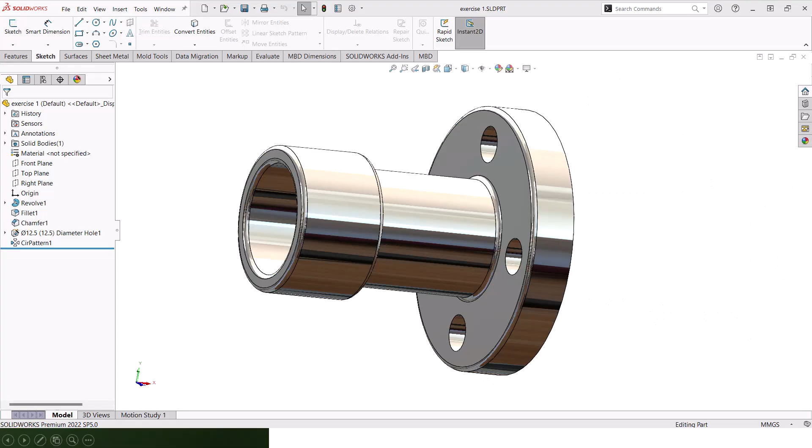What you're looking at here is the 3D model that you will be ending up with if you follow this tutorial along. Now let's go ahead and create it.

To create this part, go to New, click on Part, and then click on OK. Select the front plane and go to Sketch.

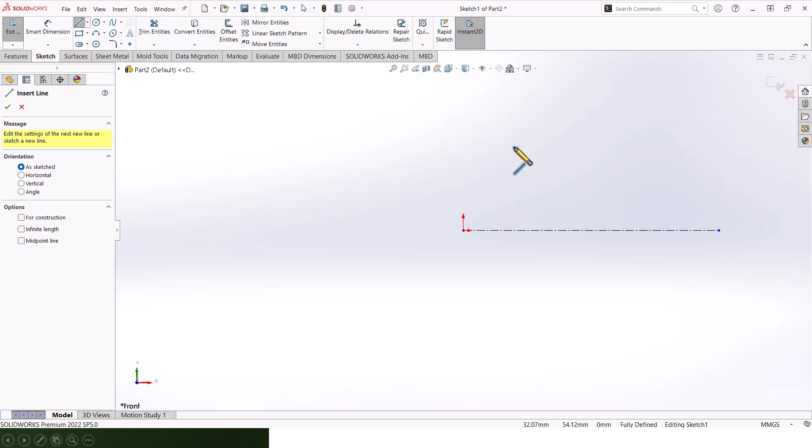Create a center line and then start sketching around the center line. Something that would look like that. So not necessarily the exact shape, you can just design something similar to these. Close your loop. Once you get this grayish area, then you're good to go and you're good to add in dimensions.

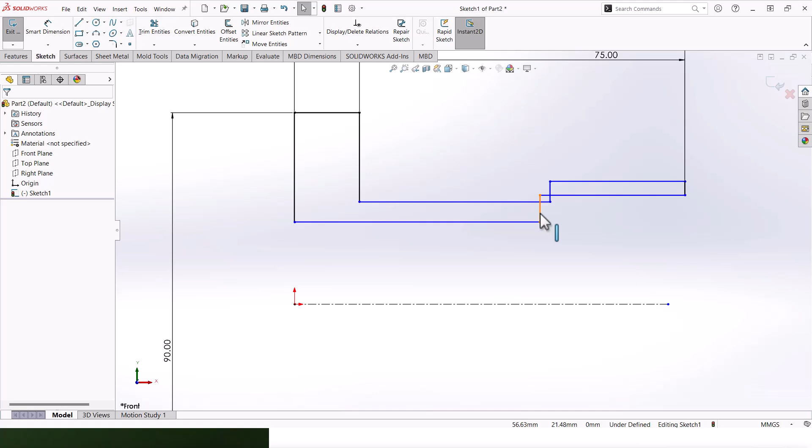If you get this kind of issues while you're designing, you can just click and drag the sketch and you don't have to worry about it so much.

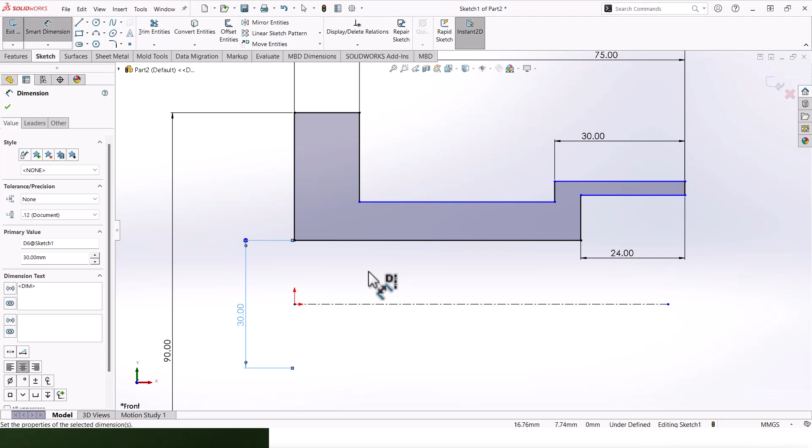This is 24, this is 30, and the internal diameter should be 30 as well. The external diameter here should be 50, and this diameter should be 38, and this diameter should be 40.

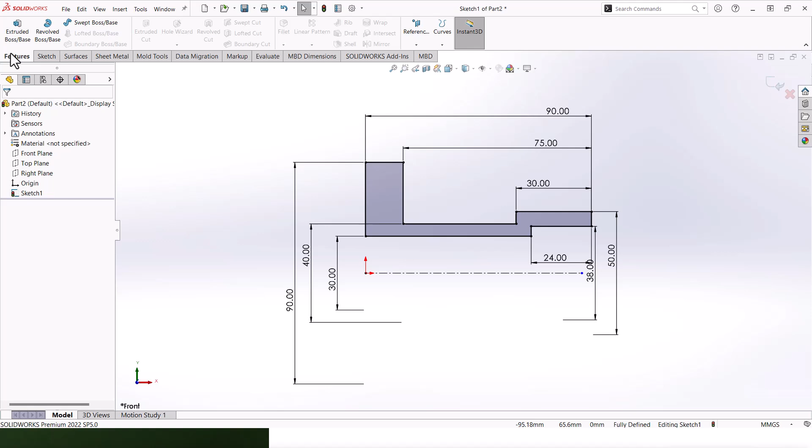So now we're done, we have a fully defined sketch. Let's go ahead and go to Feature and go to Revolve Boss. Once you're done, click on OK and you should get a similar shape to these.

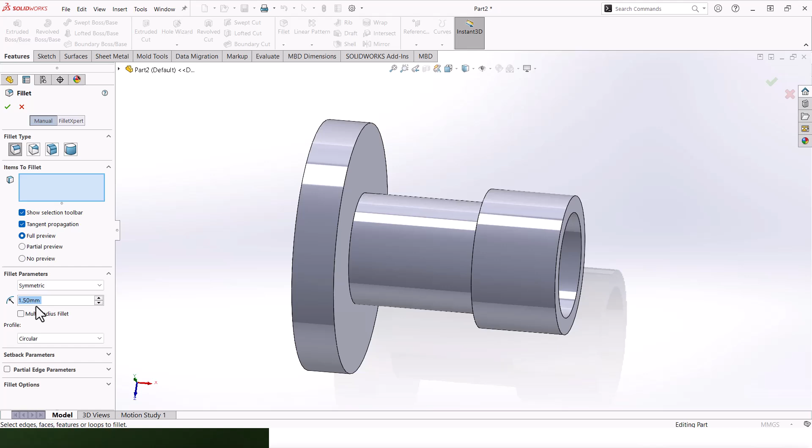Now let's go ahead and add in the fillets. We have external fillets all over our part. Let's go to Fillet, and the dimension of the fillet that we have is 1.5, then start clicking on the edges where the fillets would be. This is it. Once you're good, click on OK and you should be good to go.

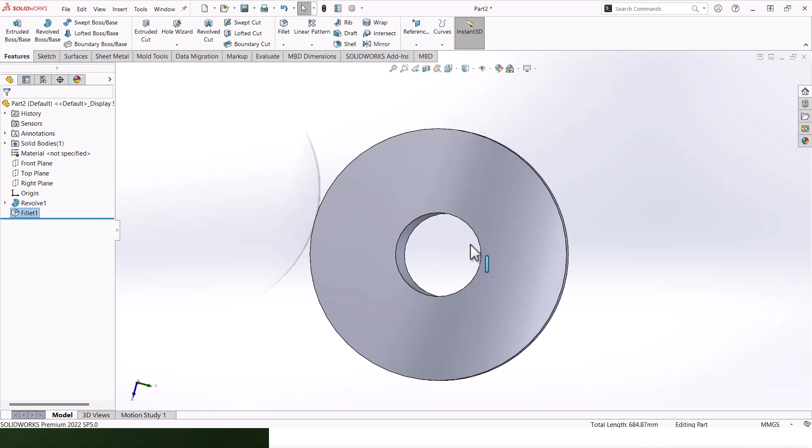We have one extra chamfer here. Let's go ahead and add it. Go to chamfer, click on this edge here, and the dimension that we have is 3 by 45 degrees. Once you're good, click on OK, select this face and go to Hole Wizard.

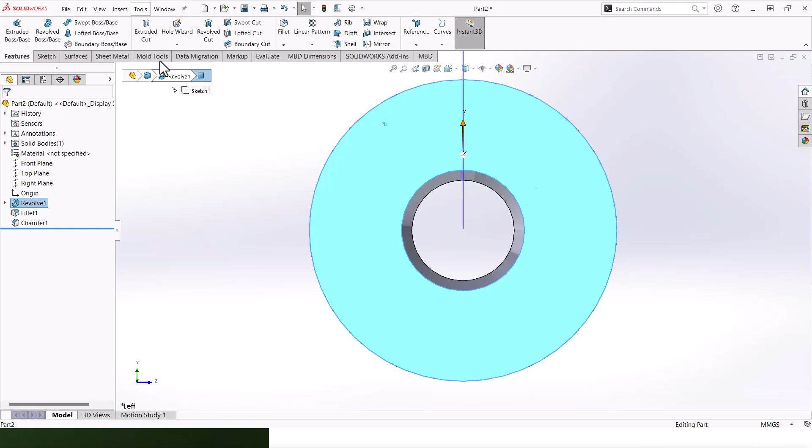Click on hole drill size and the dimension should be 12.5. Make it through all and go to position.

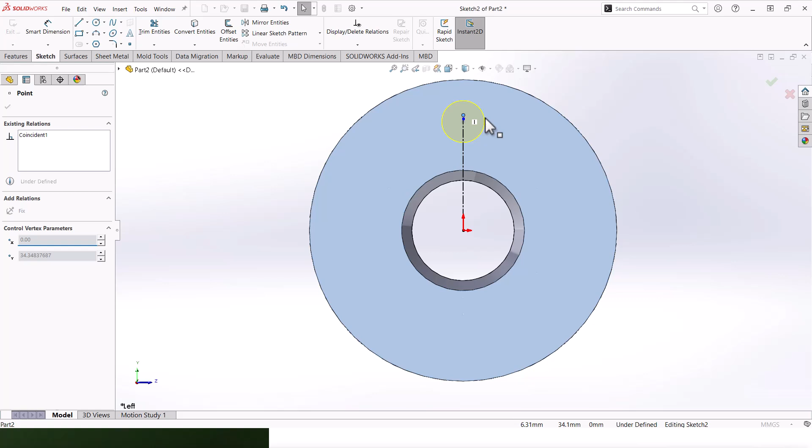Just add in a position like this. Let's go ahead and add in a center line. Make it coincident to our point. The dimension that we have is 65 divided by 2, so we have 32.5, that's the dimension. Once you're good, click on OK.

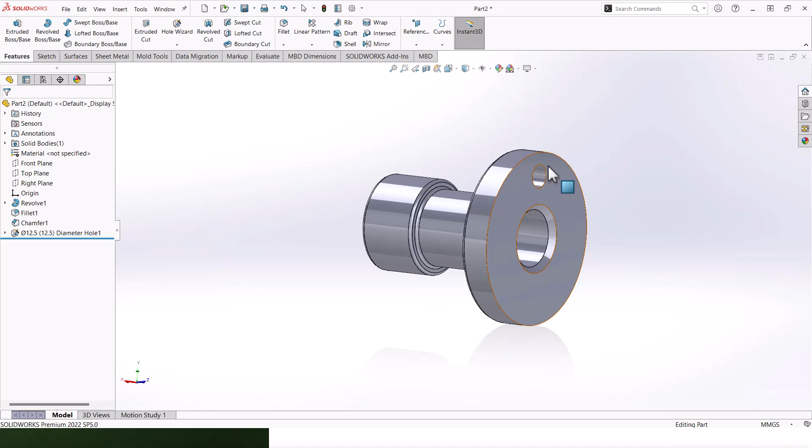And there we got our first hole. Let's go ahead and create the rest. To create the rest, go to Pattern, Circular Pattern, select the hole and go to Direction and click on this edge. So it should be 4 by 360 degrees.

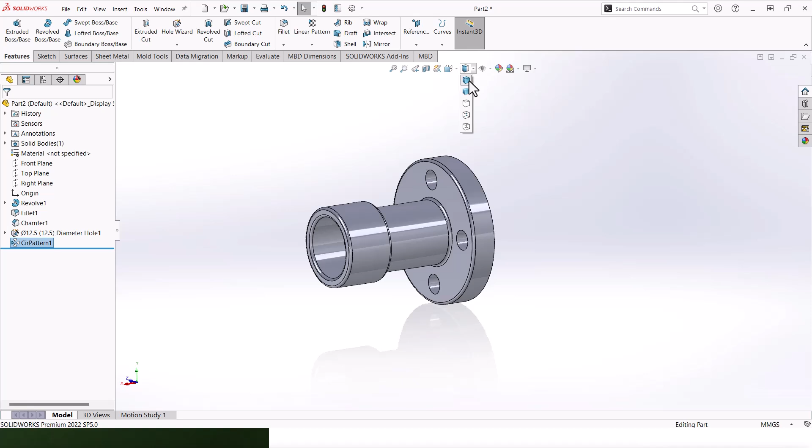So this is our part. Now let's go ahead and change the background, make it white, probably adding better appearance. Let's go to Metal, Steel, and let's go to Polished Steel.